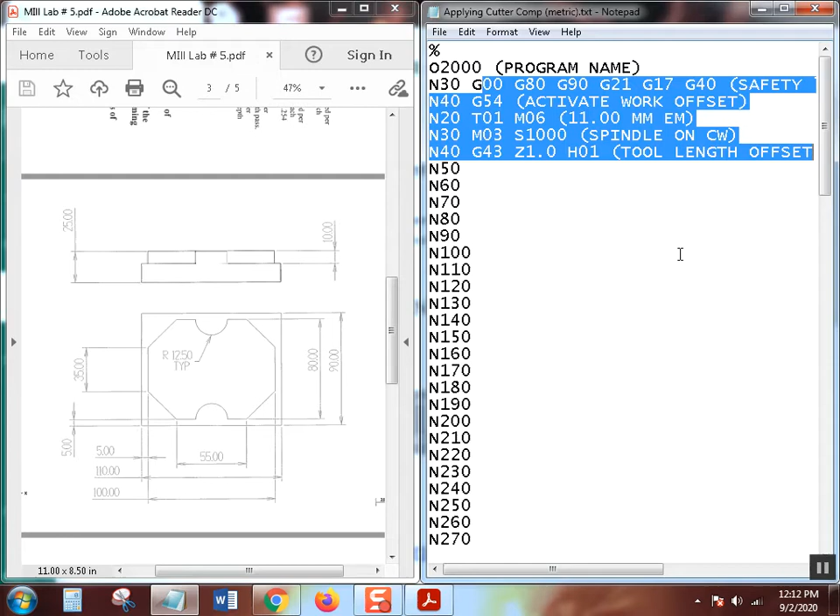Please leave it standalone. I'm going to specify it again. If you don't follow this format right here, one, I'm not going to be able to help you. Two, no machine generated code, people. If you send me something that was obviously generated from a CAD CAM software, I am not going to grade it. You're going to get a 0. I'll give you the opportunity to resubmit, of course, but let's just not do that. This class is not about CAD CAM, okay? Not about CAD CAM. We have CAD CAM classes where we use Mastercam, all right? All right, let's get back to this.

Tool change, line N20 is tool change. I put down what diameter end mill I'm using. And for the sake of that, I'm going to put some other stuff in here. I'm going to put down 4FL, which stands for 4 flute. So may I delete that? Yeah. 11. Let me change this real quick. Here's a bad thing. So you can't drag, so you just have to. I guess I can just do this. I put that in the wrong place.

Yeah. Talking and typing. Try it sometime. It's not that easy. It really isn't. Those people who do it well, I have to admit I'm impressed. All right, there we go. Let me see if I got an extra space here. Looks like I do. Can't tell with Notepad. Control S. There we go.

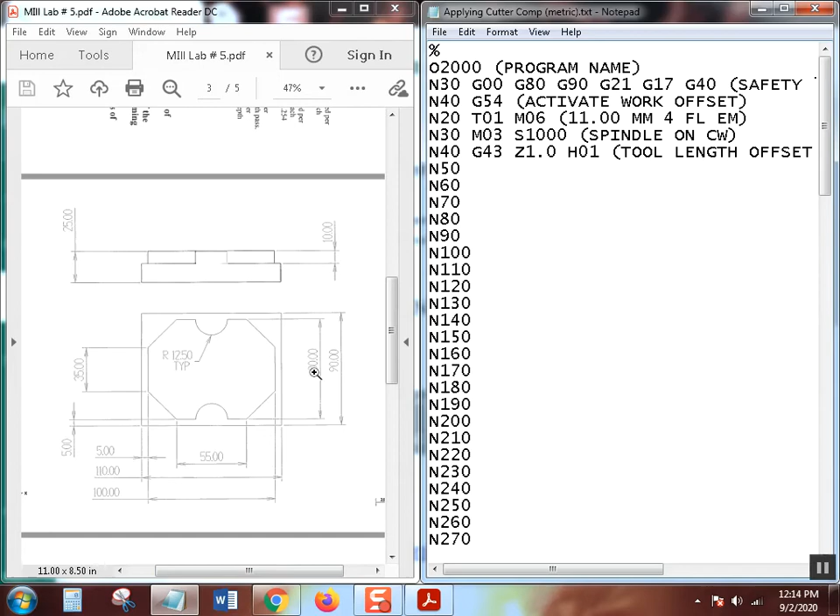So we do our tool change. We're going to use an 11 millimeter 4 flute end mill. Great. Now I'll calculate the speed here. This speed is not right. Let's go ahead and do it. I had to rotate this view, so see in the Mill Lab. Oh no, you can't see it. Using a cutting speed of, looks like, 90. It says using a 7/16 blah blah blah, cutting speed of 90.

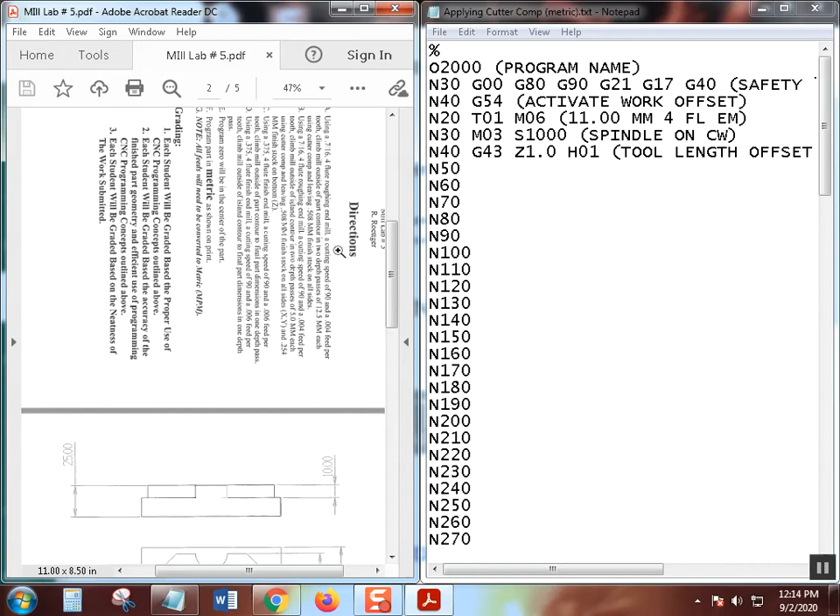So let's use cutting speed of 90. Do another RPM calculation. So we take 90 times 3.82 equals this, and you're going to say divided by 11. Well, that won't work. Well, let's try it divided by 11. You're going to come up with a really ridiculously slow number. Yeah, let's run this end mill at 31 revolutions a minute. You see, you can't put millimeters into this formula and expect to get it.

So what we do is we have to convert the millimeters to English. So let's bring that back up here. Clear you out. So how do you do that? Simple. 11 divided by the magic number 25.4. That is the English equivalent of an 11 millimeter four flute end mill, which is almost 7/16, .4375. So it's 7/16. That's the number we want to use. I'm just going to hit memory store, stick that sucker in there. Let's clear it all out.

Let's start over again. So 90 times the constant 3.82 equals this, divided by memory recall. Now this time I'll get my right RPM. Boom, 793. I'll round up to 794. So let's change that right now. 794. Great. Control S if you haven't done that.

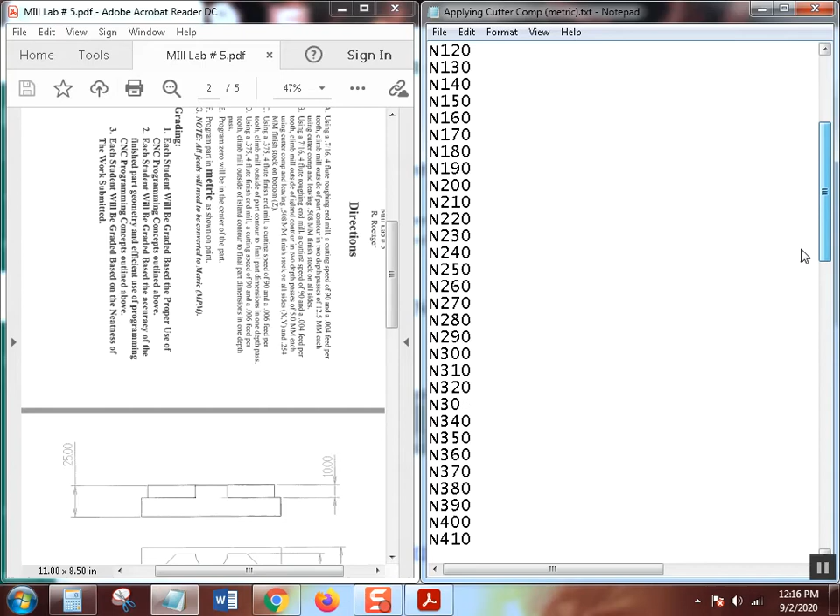Now, something else I have put up in one of the modules there, block numbers. All you have to do is copy and paste them into your program. It'll save you the time of putting them in there, because in the face-to-face class we have software that generates these for you. So I give you a little help. I copy and paste these all the way down to 1,000, by tens. So you have plenty of room there. If you need more, you're going to have to just add more yourself. Get used to that anyway.

Okay, remember that again is going to be spindle on clockwise, and that spindle speed is going to be 794. No decimal point, right? Don't put it in there, won't work. Then we're going to activate our tool length offset. Remember the H number. If this is T02, this has got to be H02. If this was T03, this would have to be H03, etc.

All right. So this is your whole program startup. The only thing that we changed this time, of course, is I put in the size of the end mill I was using in metric. I made sure I put a G21 up here instead of a G20. Now, since we are doing metric, some other things have to change. There's one thing right here that has to change.

I'm rapiding my tool length offset down to 1. Now you're going, oh, that was 1 inch. Now it's 1 millimeter. If you do that, that's not good. That's like 40 thousandths of an inch. So seriously, folks, let's just put 25.4. That is an inch. What? Really? Yeah, I'll show you. Clear this all out. I'll clear the memory too. Memory clear. How do you convert metric?

Real simple. 1 times 25.4 equals 25.4. So to go English to metric, let's say I had the decimal equivalency. I'll clear this out. Decimal equivalency of 3/8, which is 0.375, and then multiply that times 25.4. I have done this so many times on some of my calculators, the 2, the 5, and the 4 numbers on the buttons are wore off.

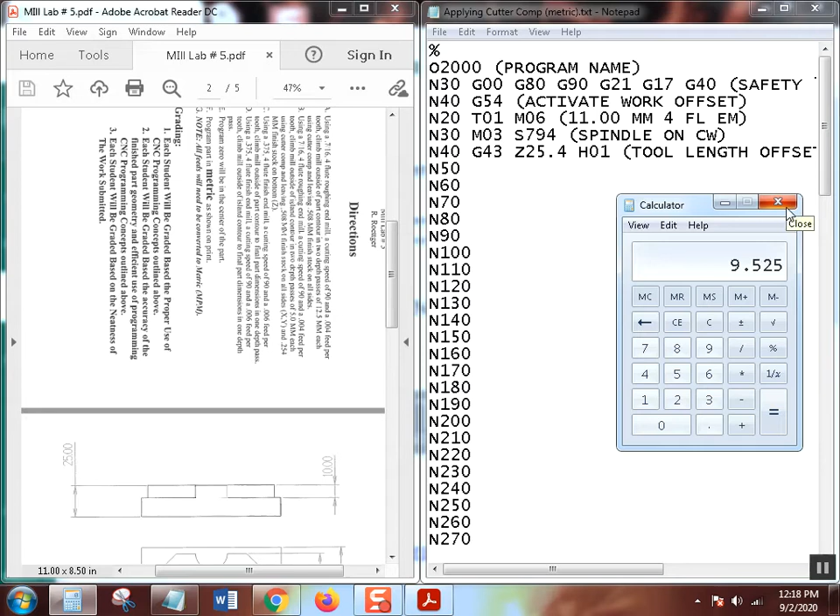So I was just showing you how we can remember. If you're going to go from English to metric, you multiply times the magic number 25.4. If you're going to go from metric to English, you divide by the magic number 25.4. All right, replay that a couple times. We're going to do a lot of metric conversions. You're going, oh no, metric already? Yep, metric. The world is full of metric. Get used to it. Okay, we'll go ahead and minimize Mr. Calculator there.

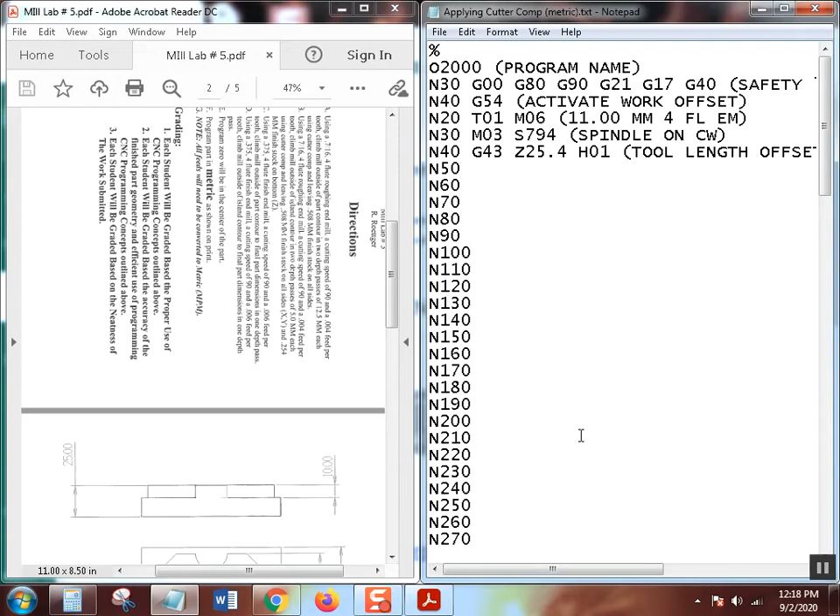Bring this back up here so we can see it. I got it all zoomed in there. And like I said, this is all in metric.

So what's the next thing we usually do? Well, we're already in rapid, so let's give it a space here. I'm going to hit Control S just in case. See, I got this applying cutter comp metric. So first I'm going to rapid again to X0, Y0. In metric, remember 0 is this.

Normally we would rapid to 100 thousandths above the part. Well, if you put 0.1, that's 0.1 of a millimeter, 100 thousandths of a millimeter. What is 100 thousandths of a millimeter? 0.1 divided by 25.4 - oh yeah, you're going to rapid to within 4 thousandths of the top of the part.

Your operators will absolutely have a heart attack. Everything has to be converted to metric. I know what that is. It's 2.54. Really, Randall? Yeah, it won't hurt you to do another metric conversion, will it?

So 0.1 times 25.4 equals 2.54. Oh my God, there's order to the universe. Control S - yeah, that's what you want. So we're going to go to X0, Y0, and Z2.54, which is actually 100 thousandths above the part.

You're going, why did you take English and then convert it to metric? By God, if you check out a bunch of metric prints and start converting them, you'll find out they're all English. Then somebody converted them back to metric, and then you have to convert them back to English.

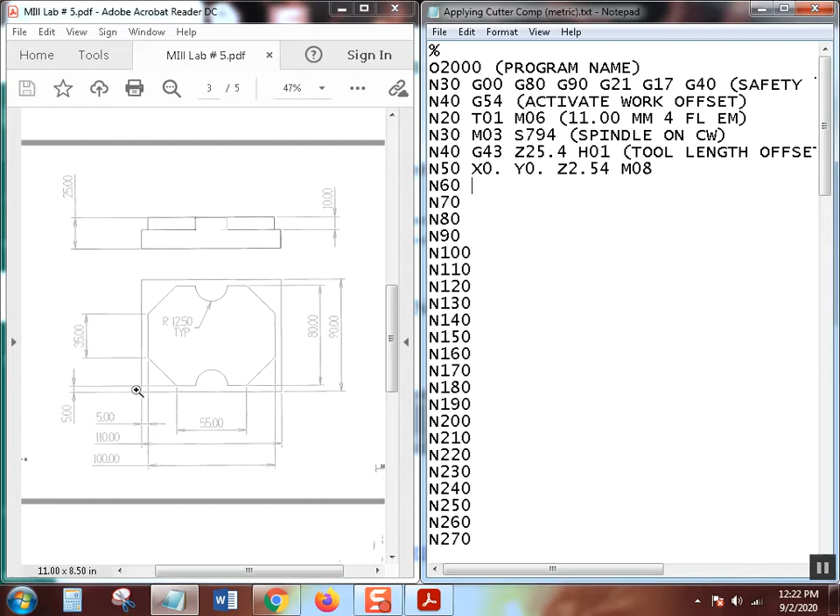Now, since this is our X0, Y0, and Z0 is always going to be on top of the part - here's the top of the part. Sorry, I'm looking for the right there, Z0, top of the part. What we're going to do is we're going to start here, and I'm going to comp down here. This is where I'm going to start my comp. This is where the end mill is going to go.

So let's see, half of 11, well, 5.5, right? If we made it 6 millimeters, let's make sure - that's half a millimeter is 20 thousandths. That ought to work just fine. Usually I use 50 thousandths, but you'd have to add that all up. The bottom line is it needs to be bigger than the radius of the end mill you're using.

Let me just see what 50 thousandths is. Don't have that one memorized. .050 times 25.4 equals 1.27. So add that to what the radius of the cutter was. What was it? I hope you said 5.5, because that's half of 11, isn't it? Last time I checked it was. So 6.77 millimeters, that's where we're going to make our safe start point.

So I rapided to here first just to make sure that I set my X0 and Y0 up. That's going to tell you, this is only going to show you if you made a big mistake. If you made a small mistake, it won't show you. You can put, as I said before, this character right here, turn on the block skip button, and it won't make that move. If you do that, anything after this, the computer just ignores. Then you can hit the block skip button and turn it back off, and then it does it.

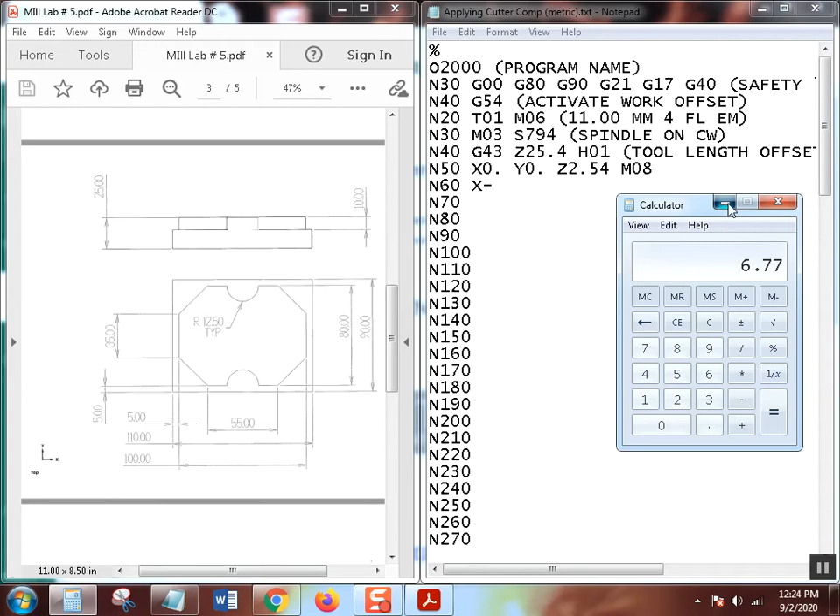6.77. Why minus? Because remember, what is the reason I am using a minus symbol? It's because I'm on this side. Remember, anything on this side X0 is minus. Anything on this side is X plus. Anything on this side of Y0 is a plus move. Anything on this side of Y0 is a negative move.

Anything here, Z0 is on the top, so anything above it, this is a Z positive move. Anything below it, a Z negative move. Now, there are places in Europe that they actually make Z0 at the bottom of the part, and places in the United States too, so that's a whole different world. I cannot account for every single formatting. Bottom line is, let's do this too.

Okay, now I'm going to call that. Hey, look at me, I'm actually doing this in the morning instead of in the afternoon, so I'm not so tired.

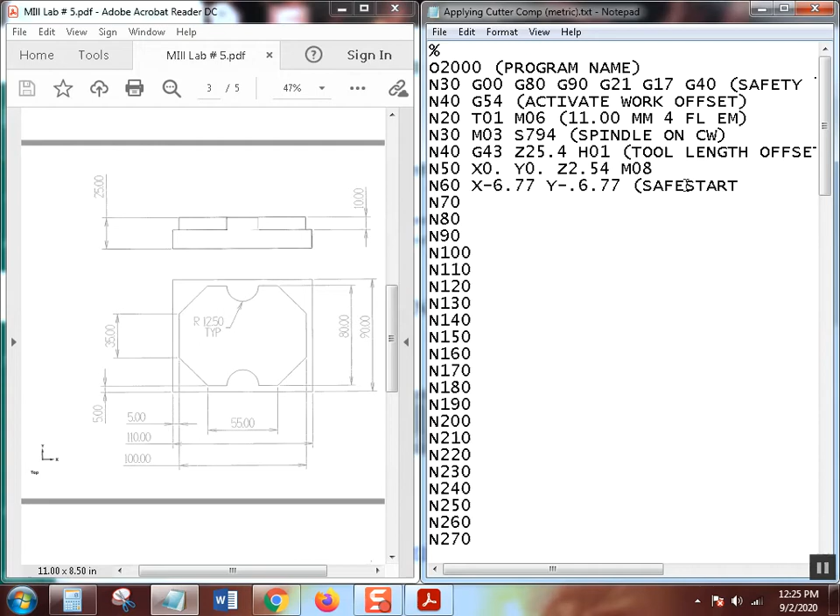POSITION. Yeah, Control S if you haven't done that. Bring that back. All right, great. So we rapided to that. At this point, the machine is running. The coolant's on. I've got my RPM at 794. I've got my tool length offset called up. I rapided down to 2.54.

Remember, all of this stuff has to be in metric. The only thing that doesn't have to be in metric is that. That's it, that's it, everything else has to be in metric. Don't forget that G21 up here. Life does end, you know, as far as the CNC control is concerned, if you don't do that. Seriously, you'll get a big bad error. It'll go, what? Or you'll end up with some really ridiculous stuff.

Most machines now go, they'll say something like, are you sure you want to run in metric? Or metric selected, yes, and you may have to change a setting. It's just like a check, so that they want to make sure that you know that you're actually programming in metric or English. It'll do both.

All right, let's take a Z move. So we're going to do a G01. We want Z to come down. How far do we want to come down? Not a realistic part, we're going to go ahead and pretend we can do this all in one pass. We could not do 25 millimeters with an 11 millimeter end mill all in one pass, no way. But just for this, because we're just learning, I'm going to go down 25.

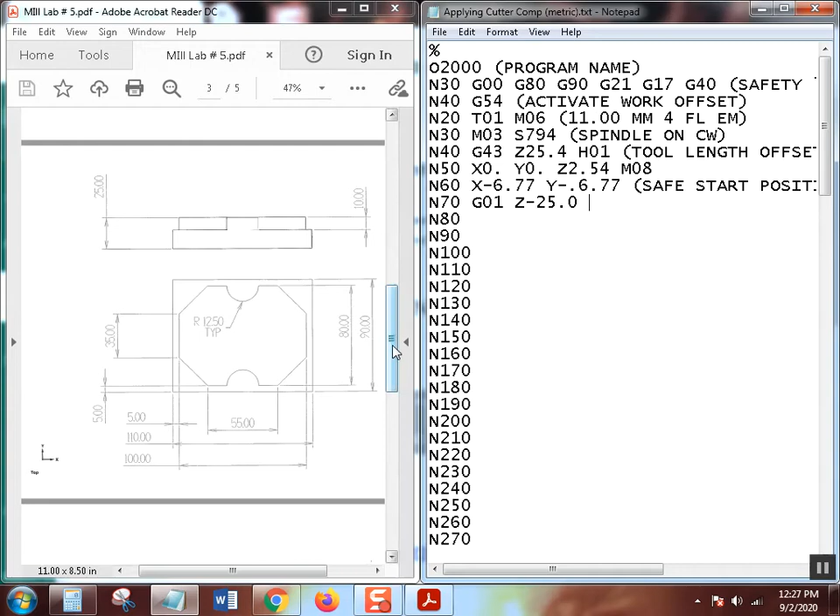Now, metric feeds, oh boy. Well, metric feeds are pretty simple, really. You just calculate up your feed like you would in English, then you convert it to metric. Yep, that's right. So let's see how many feed per tooth. Looks like a 4 thousandths feed per tooth. You can't see it, but I can. It says 4 thousandths. So 4 times 4 is 16. So 16 thousandths times my RPM, right? Let's do that. Let's clear this out.

0.016 times my RPM, which is 794, equals 12.7 whatever inches per minute. You want to convert that to metric? Yes, you do. Your feeds have to be in metric too.

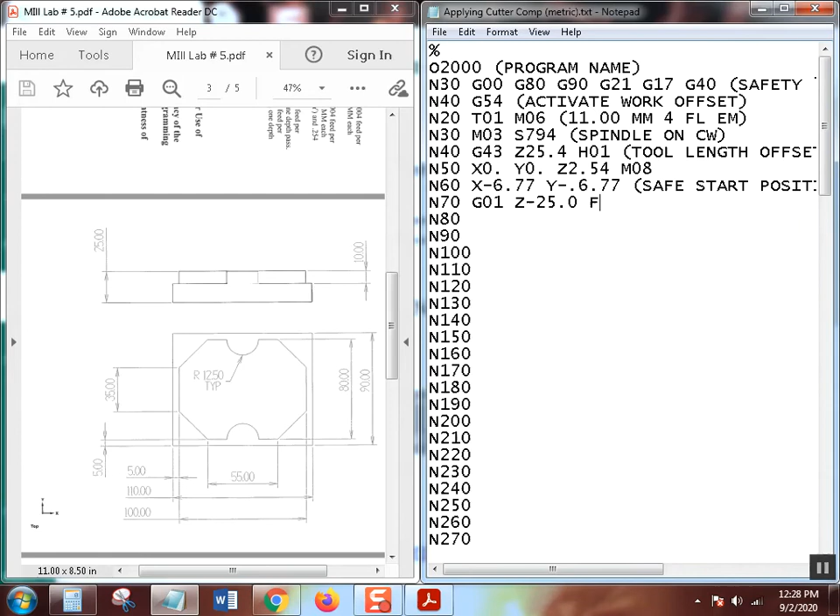Times 25.4 equals... oh my God, you're going to look at that and go, that is huge. If somebody doesn't know this and it's the first time they've seen it, I should have copied that, shouldn't I? I will copy that. Copy. Okay, don't forget the F. And then paste. Let me go back to this.

Okay, first time you see this, now don't carry that out to 4 places. You know, you can put decimal points in there. You really don't need to. Oh, yes, you do. You do need a decimal point in a feed. Oh my gosh, I almost screwed that up. Always put decimal points in feed.

So just round it to that. That's fine. That looks incredibly large. You're going, oh my God, he's milling at 322 inches per minute. No, I'm milling at 322 millimeters per minute. That's right, millimeters per minute.

All right, that's the feed. Okay, get it right. So you can watch that a couple times. I'm not going to do that 4 or 5 times. All right, so millimeters per minute, we got the feed. We moved down 25 millimeters. Now we're going to apply cutter comp.

Now let's talk about some different codes. There are 3 codes associated with cutter comp: cutter radius compensation, cutter diameter compensation. That's the last time I'm going to say that. From now on, I'm calling it cutter comp, it's just easier. G40 cancels it. G41 is cutter comp left. G42, cutter comp right. I also uploaded a really nice list of G codes.

You should check those out. I would print those out for your reference. That is a very good list. Remember, not all machines use all the same G codes. The majority of them, like 98%, will be the same, but each machine or each control does use machine-specific G and M codes. So I can't tell you, I'm not going to program for every single machine out there.

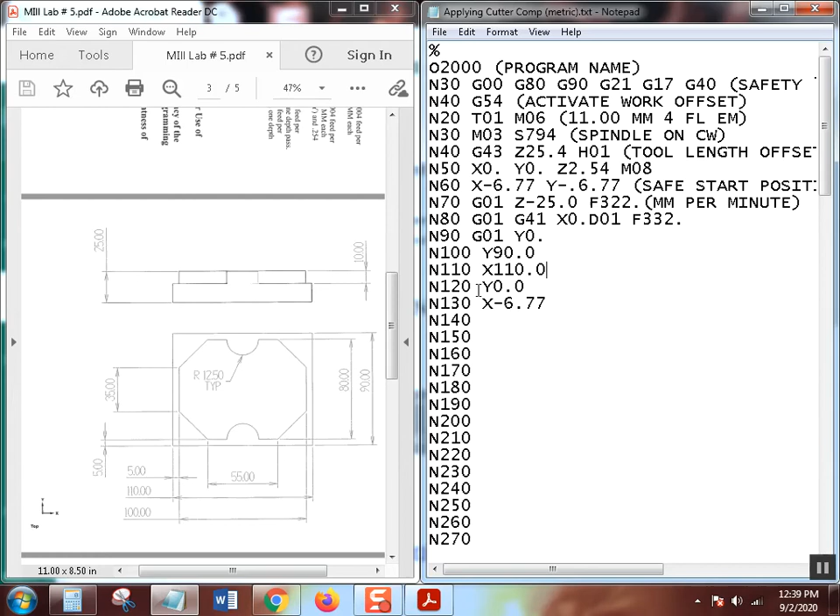Now what I want to do is I want to turn my cutter comp off. Now you're going, why didn't you put G01s in there, Randall? You don't have to. It's modal just like the G00 is. Unless you change it, it's there. So see, look how much easier this got. All we had to do was put in one set of coordinates. Now if we're moving at an angle like this angle right here, we have to program it in 2 sets. But since all we're doing is going from there to there, remember this is your first cutter comp thing and a little bit of introduction to metric. So yeah, I'm going to turn it off.

I am going to turn it off. So let's put a G40, and then now we were at, we want to go back to our Y safe spot. Y minus 6.77. Control S. All right, now let me show you what I'm talking about.

Between the G41 and the G40, there is nothing but coordinate moves. No M codes, no Z moves. You try to do any of that stuff in there, don't get fancy, it won't work. Now, I know Mori Seiki will let you do that. CAD CAM, they turn it off and on, and actually a lot of time CAD CAM doesn't even use cutter comp here. It'll do comp in the control, can be comp in the computer. There's just a lot of different ways to make it comp. So get what comp is.

Cutter comp is that. At this point, we're back at our starting point, and I'm all turned off. All right. Now, what am I going to do? Well, there's a variety of different things. I could complete this program. All right. And I guess let's just go ahead and do it. Why not? It's not taking that long.

Come down here. What I want to do is, well, I'm going to move Z up. So I'm going to rapid Z up, G00. This is an island. See, it's an island. It's 10 millimeters deep. So Z, and even though we're going up, remember, everything comes from the top. So that's Z minus 10. If you tell it to go to Z10, it's going to go 10 millimeters above the part. Oh, that ain't going to work. That will work. Control S. All right. Now I moved it up.

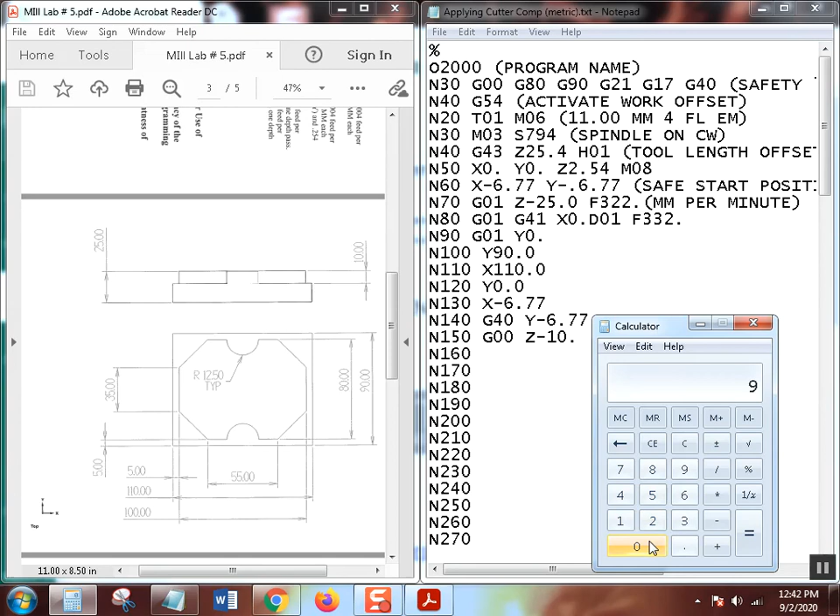So we had 1, 2, 3, 4. What is this point right here? I got 90 minus 35 divided by 2. Yeah, that's what it is. 90 from there to there, 35 from there to there. It's centered. So 90 minus 35 divided by 2 equals 27.5. So that coordinate right there is going to be in Y. Y is 27.5. Okay? And what is X? Well, X is given to us, 5.

Let's minimize that. Z's where I want. Spindle's still running, feed's still active. So I'm going to go G01. Don't forget that, because once you go from G00 to G01, you definitely have to put it in there, or it'll be stuck in G00 and you'll crash. X is 5 millimeters and Y is 27.5. So let's turn this on. G01, and first off, we're always going to make this move perpendicular from our safe start spot.

So X is going to be 5. Let's put our G41 in there too. I like to put it just like that. There we go. Okay, Control S. So G01, G41, X going to 5. Don't forget your D, D01. And probably ought to program a feed because it's a good idea. 332. And don't forget that decimal point.

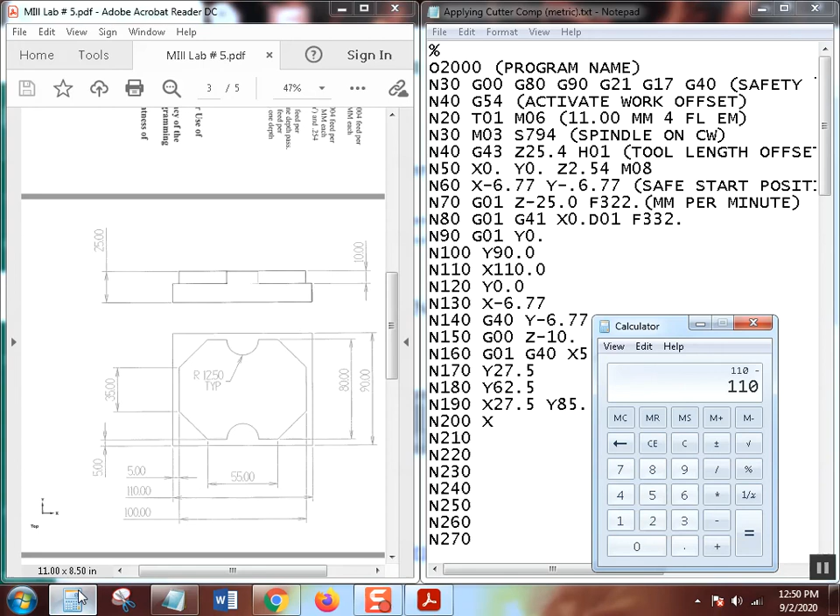So I know it's 27.5 from there to there. Okay, right? Because it was 27.5 from here to there, and this is centered, so it's 27.5 from there to there. So I guess all I have to do is just take 110 and minus 27.5. 110 minus 27.5 equals 82.5. So I'm going to move the x to 82.5.

Notice I am putting in the actual dimensions. Once you turn the comp on, you're fine. Now, I'm not using, that's it. New line. Control S. Now I'm going to make an X and a Y move. X, I know what the Y is because it's exactly the same as this one over here was. X though, let's see. Well, how are we going to come up with the X?

Well, we know it's 100 from there to there plus 5. It's 105. 5 millimeters from there to there plus 100 from there to there. That's 105. So X is 105. Point. You can put a 0 in there if you want to. And Y, it's going to be exactly the same Y as this one over here was. So what was that one? Was it 62.5? Well, it surely wasn't 82.5. No, it's 62.5. So, see, this is another reason for you to put your coordinates on your coordinate sheet and give you a reason why to do it.

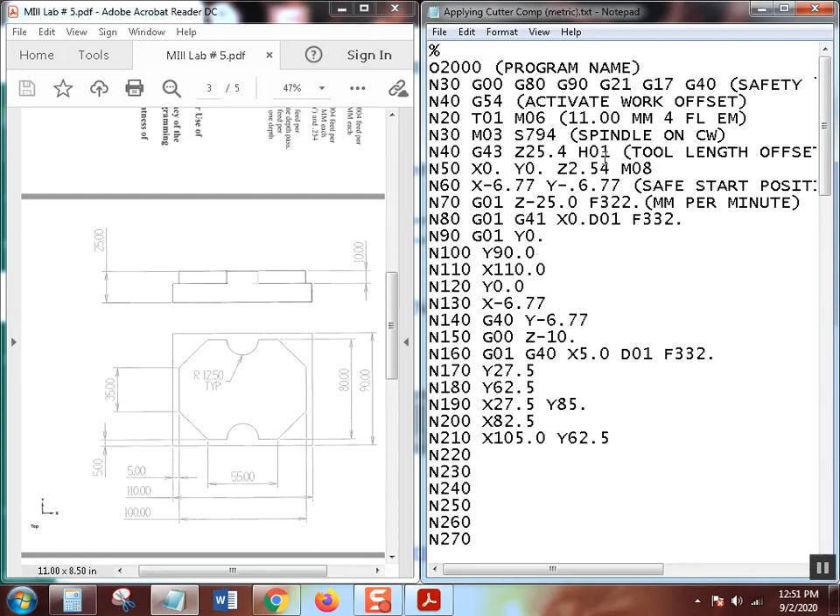You don't have to. And folks, all I really need you to submit is this. A lot of people were submitting setup sheets and stuff like that. You don't have to do that, people. On the online course, just send me the program. Okay, that's all I need.

Hit Control S, new line. So we're right here. Okay, I'm not even going to go points anymore. Dang, I keep opening that because I got the numbers already formatted. Keep forgetting. This time I'm going to what? Right down again. So I'm moving Y. Notice I'm only programming in the axes that I need. Well, we knew what that was too. That's Y is what? 27.5. Okay, very good. New line. Oh, dang it, quit that. Stupid me. Delete.

This time we're going to move another X and Y move. So X, it's the same as it was up here. It's right in line with it. So what was that? I'm going to say that was X 82.5. Y is going to be, well, looks like 5. It's 5 up, so Y is 5. Again, please do not forget your decimal points. It takes forever to find that. That's an error that you'll go, oh, what's wrong with this? Control S if you haven't done it.

Okay, so I'm right here. We're going to go over to here, so I'm just moving the x-axis. You know, I've already got all my coordinates picked up now. What was it? It's the same as this one over here. So what was that one? Well, I think it was x 27.5. Yep, x 27.5. Once you get good at this, Control S, okay? So now we're right here. Remember, we're not doing the radiuses. I'm not doing it for this example. This is just how to turn cutter comp on.

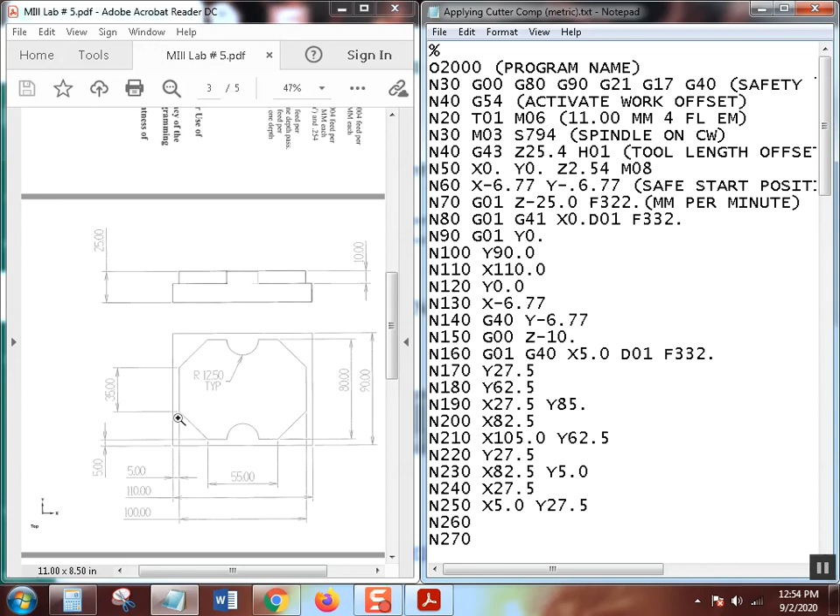So what we'd have to do is later on we'd have to trig a point out here to go to. All right, that's all there is to it. Here, see, I forget every time you click on this, it's because I'm still in Zoom. Let's go out of Zoom. I hit escape and we'll go out of Zoom. I wish I could get the arrow. Bottom line is we'd need to continue on out to clear that cutter, or we're going to end up with a little scallop there. We're not doing it. I'm just showing you how to turn cutter comp on and off.

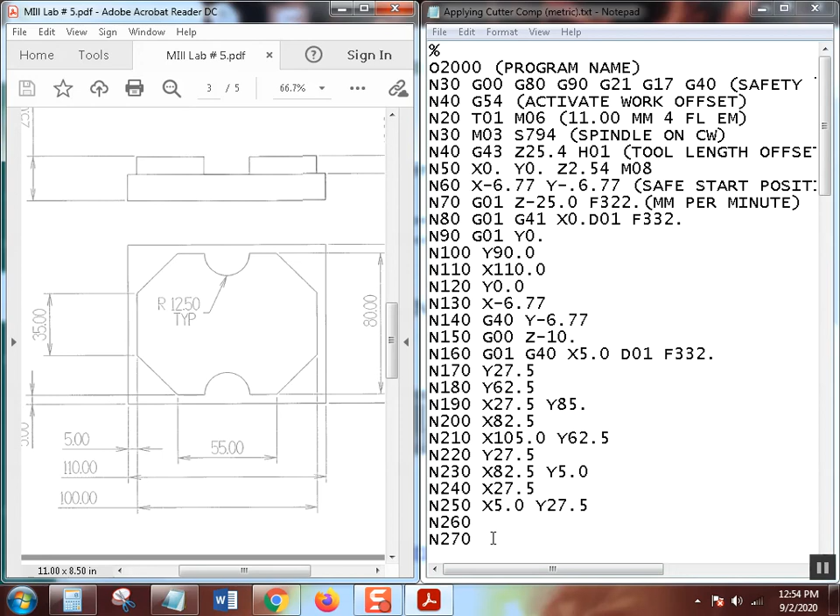What do we do at this time? Well, this is pretty simple. We'll just do the same thing. We're going to do a G40 to turn it off because we've finished our part. G40. X is going to go to its safe spot, which was minus, let me see, this is why we go up here and look, 6 points. I got 2 points up here. That is an error. Told you it's hard to catch. X is going to be minus 6.77, and do that.

New line, Control S. Excuse me, that G40 doesn't go there. I want that G40 in the Y move. Because what you're going to do is you're going to come up and go over. Now this time you don't have to go back to your safe spot. You just have to make a move that is greater than the radius of your cutter. So G40, turn it off.

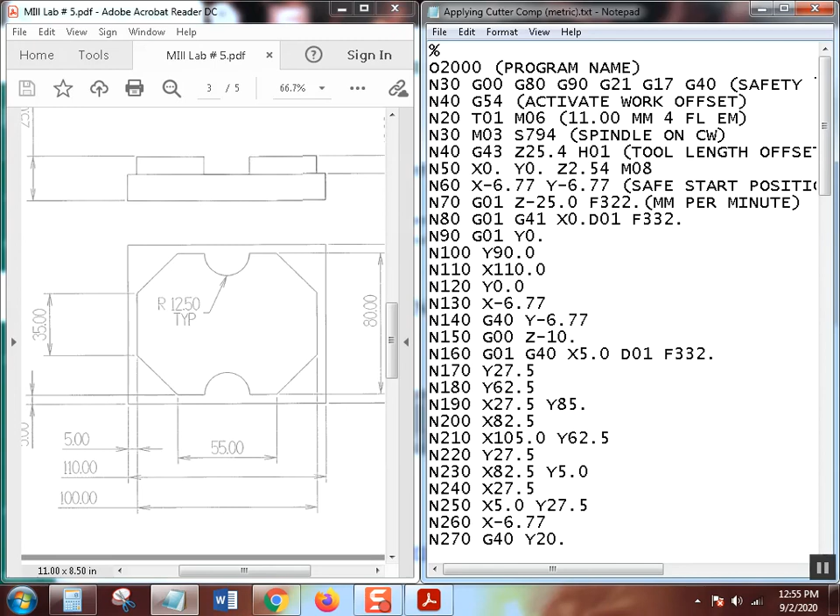And I'm already at Y27.5. If I went to like Y, I'm off the part. So if I went to Y, what? I need at least 6.77. If I went to Y20, that's 7.5 millimeters. That would be fine. So let's do that. I'll just go to Y20. And that will turn the comp off. Okay, now I have to do this.

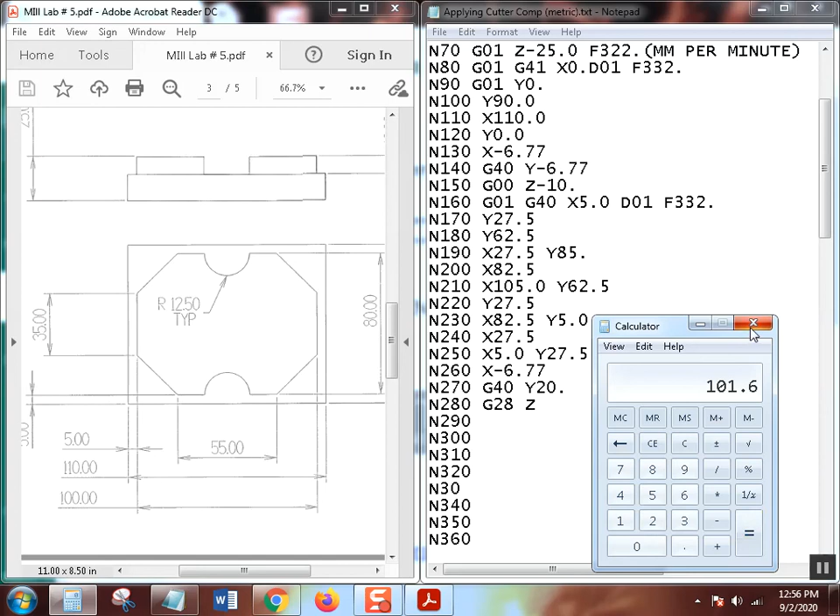At this particular point, we're ready to go ahead and end this up. G28. And don't put in Z 4.0 because that ain't right. Remember metric. So 4 times 25.4. 4 inches is 101.6 millimeters. So Z 101.6. Control S.

Next thing we're going to do here is we're going to give it the good old M30. And remember what the G28 does. The G28 is going to send the machine home as fast as it can go. But first, the Z will move up 101.6 millimeters above the top of the part. Then all axes will go home and recalibrate themselves. M30 says simply end of program, and then don't forget a percentage sign.

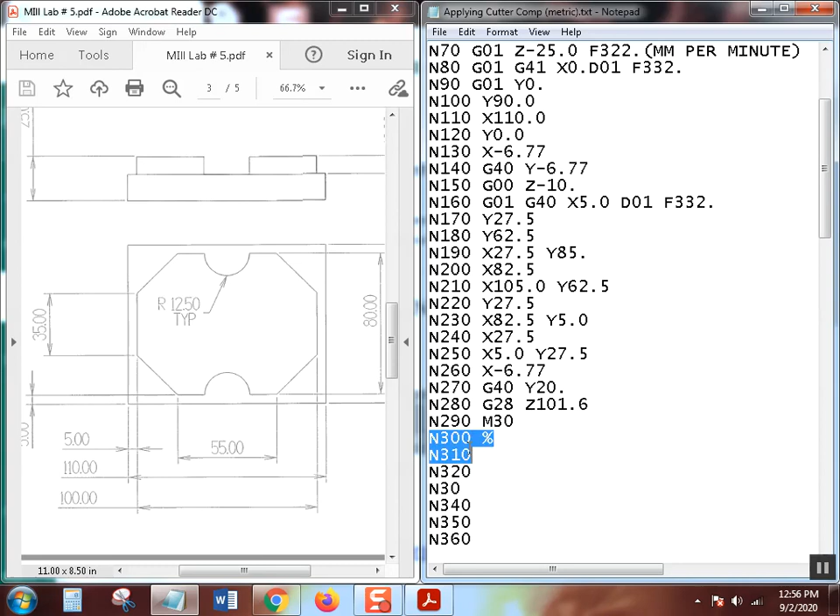Now, a word about this real quick. You can't have any block numbers after this. So here's how you do this. Just wiggle it, get all the way down here. Look, there's the percent sign. Hit delete, and then delete. If you try to put a percent sign on a block number, a lot of machines will error out. Control S if you haven't. That's it. So let's go over the basic rules.

First off, G40 cancels it. You always have to turn it on with a move that is greater than the radius of the cutter. I use a 50 thousandths radius. 50 thousandths radius, not gradius.

Let's go ahead and go back to that. G40 turns it off. G41 is cutter comp left. G42 is cutter comp right. We'll do more cutter comp lefts. But remember, we're always going to climb mill, which means we're always going to mill in the direction of cutter rotation. We want the cutter going like this. I wish they'd have a little dot or something, but they don't. PDF files are what they are. Bottom line is that should work good for you.